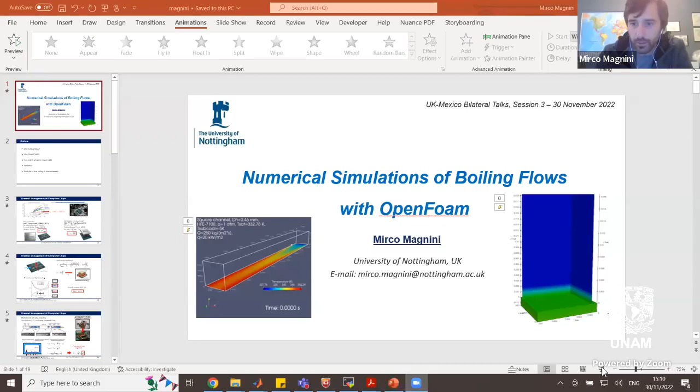Thank you, David. Thank you, Ana Elena, for the introduction to all the session. Let me see how to share screen. And full screen. Can anybody tell me if you can see my slides all right? Yes, we do. Okay, thank you.

Okay, let's start then. So welcome everyone who is attending this session, and my name is Mirco Magnini. I'm from the University of Nottingham, and in my talk I will present a little bit of the work we've been doing in numerical simulation of boiling flows using OpenFOAM, and OpenFOAM is now a quite popular open source software to run computational fluid dynamics simulations, but not only, as I will show. So the talk's general background is heat transfer and fluid mechanics. So you'll need a bit of this to be able to understand what I'm talking about, but I hope it can be useful and enjoyable for people from the wider background.

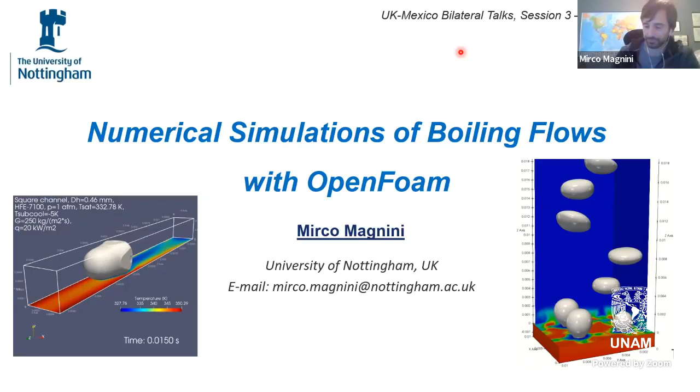So what's the general outline of my talk? I will start with explaining why boiling flows, who cares about it, why OpenFOAM, so why do we need an open source solver to do this kind of simulations. I will introduce the boiling solver that we are using, that we developed ourselves, show you how to do validation of these numerical methods for flows that are quite complex, and then I will jump into how we used it for the specific objective of helping the design of micro evaporators.

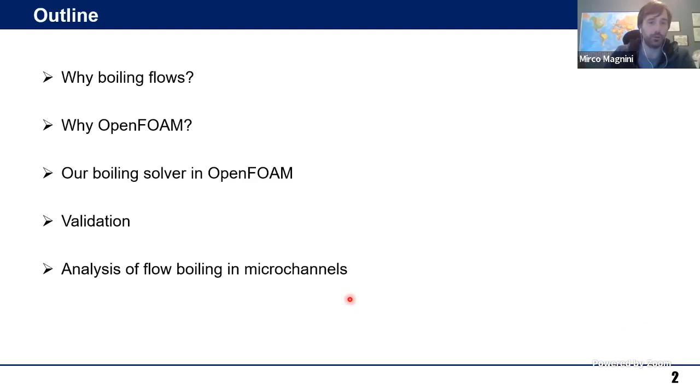And for example, if we consider the workstation we are using to run our simulations, it's quite an old workstation, but if you divide the thermal design power, which is, let's say, the heat generated by the CPU, 280 watt, by the size of the CPU, 74 millimeters square, you get a heat flux which is on the order of the megawatt per square meter. So you can imagine a square meter, and there will be 3.8 megawatts to be dissipated through this small surface.

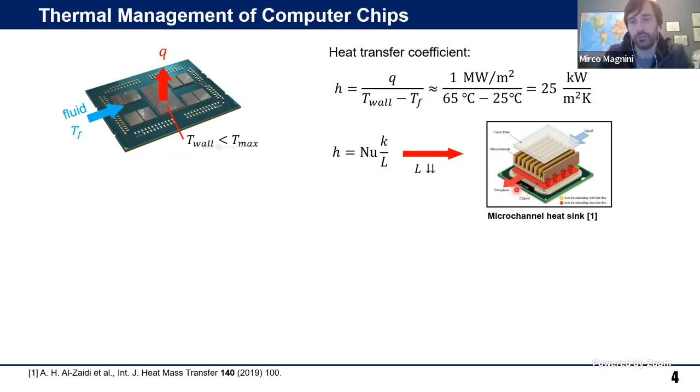And we know from thermofluid classes that the heat transfer coefficient can be estimated as the product of a Nusselt number, which is a non-dimensional number that tells us how good we are at exchanging heat, and the ratio of thermal conductivity of the fluid, which is a property of the fluid, and a length scale. The length scale characterizes the size of these tiny channels. So smaller channels enable us to get higher heat transfer coefficient. And this is the reasoning behind the use of these very small channels.

You see here that we can range the aspect ratio from very narrow and vertically oriented channels to very narrow and horizontally oriented channels. But whatever we do, because it's a very small channel, the flow will be laminar and the Nusselt number is limited. So there is a technical limitation on single phase liquid cooling, which is the best Nusselt number you can achieve is 8.24. And this will put a limit on the heat transfer coefficient that you can achieve.

So here two-phase cooling comes in to help. With two-phase cooling, instead of cooling the microprocessor with, let's say, water at 20 degrees, we bring the fluid close to saturation temperature. And when the temperature goes above saturation, the fluid will boil. It will generate bubbles. And this boiling fluid is very effective in actually removing heat.

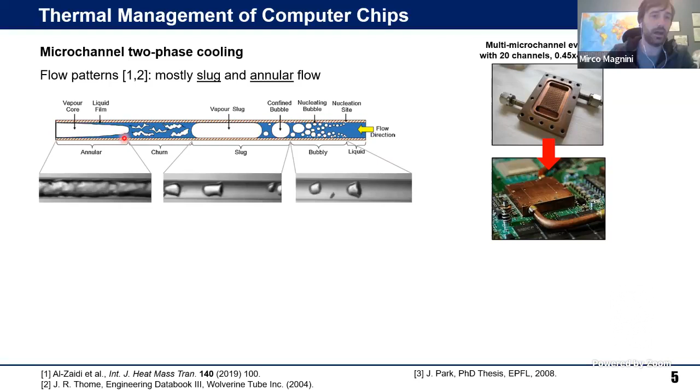So here there is this series of images that shows that a two-phase flow pattern will move from a bubbly flow with many tiny bubbles being generated, to slug flow where you have all these long vapor bubbles that occupy the entire cross-section, and eventually annular flow when you get into higher fractions of vapor in the channel.

And when we consider slug and annular flow, the theory tells us that the heat transfer is related to the liquid film thickness. So these long bubbles all trap a layer of liquid around them. So this is a cross-section of our channel. There will be the vapor at the center, the liquid around it, and we can actually solve very easily the one-dimensional heat transfer through this liquid film. And this is like a year 2 thermofluids class.

You can actually find that the heat transfer coefficient that the two-phase flow will enable can be estimated as the ratio of the thermal conductivity of the liquid divided by the thickness of the liquid film. So potentially we can achieve a very, very high Nusselt number if we have a small film. At the same time, if this liquid film dries because, for example, it evaporates completely, then we will lose a lot of heat transfer because there will be vapor in direct contact with the surface. Vapor has a very low thermal conductivity, and then we are doomed.

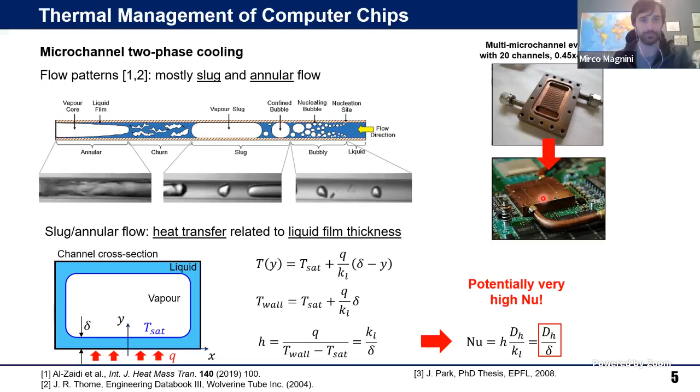The way these multi-microchannel evaporators work is that because we use a dielectric fluid, we can place the multi-microchannel evaporator in direct contact with the surface to be cooled down. So we get a very, very low thermal resistance this way. So this is the reasoning why we want to use microchannel two-phase cooling.

But there is quite a vast experimental literature about microchannel design. And when you look at the literature, especially at the aspect ratio of the channels, you can find a bit of everything and the opposite of everything. You will see people that say low aspect ratio channels are better, others that say high aspect ratio channels are better, others again that say aspect ratio 1 is the best one. So the study I show you today is oriented to find the best microchannel configuration.

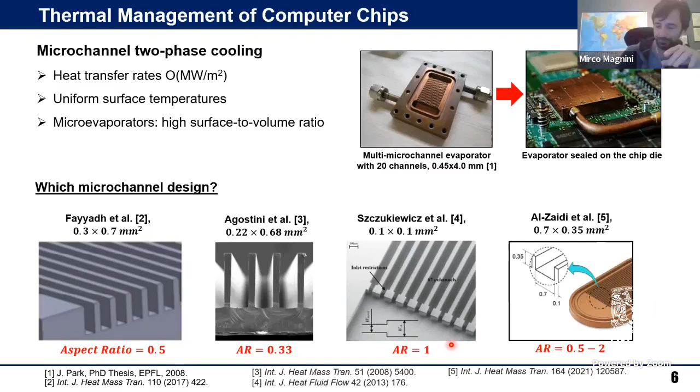But why did we use OpenFOAM to do these kinds of simulations? Well, you may be aware of people working with thermofluids using ANSYS Fluent as a commercial software to solve these kinds of problems. It's a few years since we transitioned to OpenFOAM, mainly because OpenFOAM does not need any licenses. So you can run it over hundreds of computational cores without any license. It gives you complete access to the source code and it's totally customizable. Especially when you use it for research purposes and want to implement sophisticated models, having full access to the source code is really crucial.

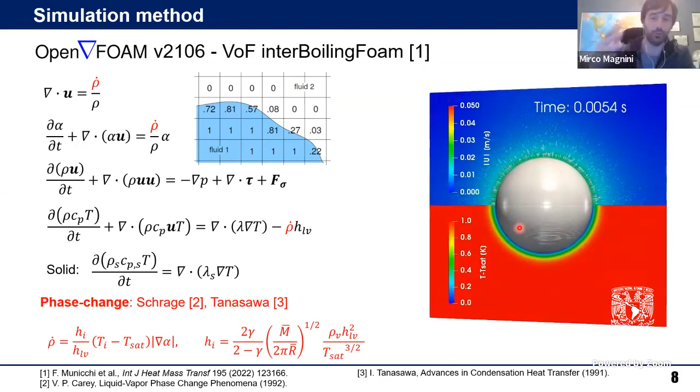This nice video you see here on the right just shows one of the typical test cases where we have a bubble growing in an infinite liquid, and we compare the bubble growth rate with an analytical solution for this problem. Now, how do we validate these kinds of models? So we have done a long series of validations, but here I'm just showing you two limiting cases.

One is called nucleate boiling. Nucleate boiling is the situation in which we have, like in a pot of water, where we boil water, for example, to make tea, and we see that many bubbles are generated in the water. So here we have a wall at a temperature above saturation. So for example, we have a wall at 112 degrees Celsius, and above the wall there is water at 1 atmosphere, so it will boil at 100 degrees.

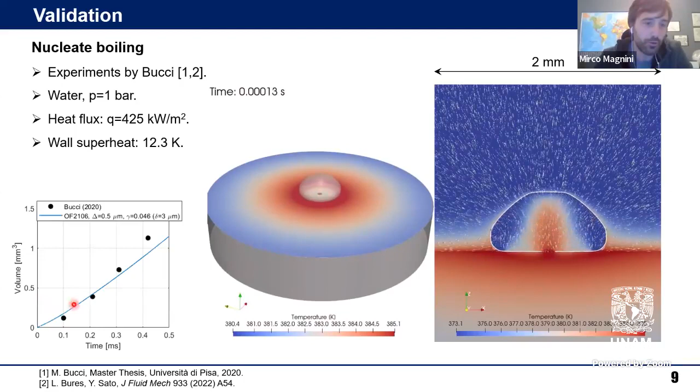A vapor bubble is generated, the vapor bubble grows over the surface, and as it grows, it removes heat from the surface. You see that there is this cold ring underneath the bubble here. So we have done this simulation here to compare with experiments, and we compare the bubble volume over time with the experiment. We get a reasonably good agreement.

Beyond that, now this is a bit more complex, but we are comparing what happens underneath the bubble. Underneath the bubble, there is this very thin layer of liquid that is trapped between the growing bubble and the wall that is fully captured with a mesh. And the experiments we are using for benchmark are giving us the wall temperature as a function of space. X here is the horizontal coordinate.

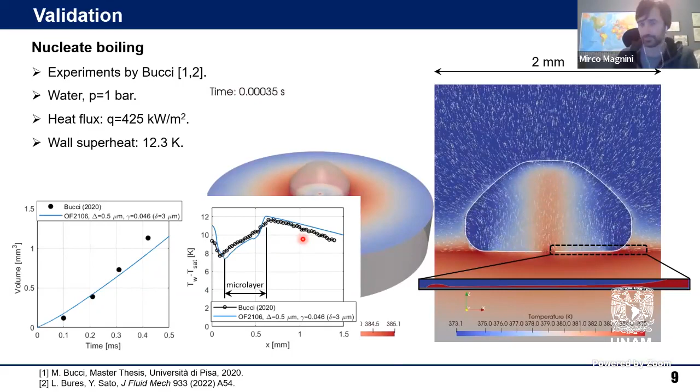And we can compare our simulation with the experimental result where we get the temperature as a function of X, and we see that in the region occupied by the bubble, which is called microlayer region here, we get an excellent agreement with the experiment. The second set of experiments with which we are comparing is more pertinent to the flow we want to study, which is flow boiling in a microchannel.

So we have a small channel, and this time we have water pumped into the channel. The wall temperature goes above saturation. A bubble will grow and will also move downstream because of the flow of liquid. So we have taken an experimental database from the literature where they measure the bubble volume over time.

So after this, we started to work on the study that we wanted to achieve. So we wanted to study the impact of the aspect ratio of the channel, so let's say width over height, the way we define it, on the boiling dynamics and on the heat transfer generated by the two-phase flow. So we start with a long channel with the walls around it. We put symmetry boundary conditions on the sides to emulate the presence of multiple channels.

We give a constant heat flux at the bottom wall, and we first run a single phase simulation until steady state. This is the first step. We let the fluid flow develop until we reach steady state, single phase. Then we seed the tiny bubble, which is this gray bubble that you see here. And we let the simulation run until the bubble reaches the end. At the bottom wall, we set a constant heat flux of 100 kilowatt per square meter.

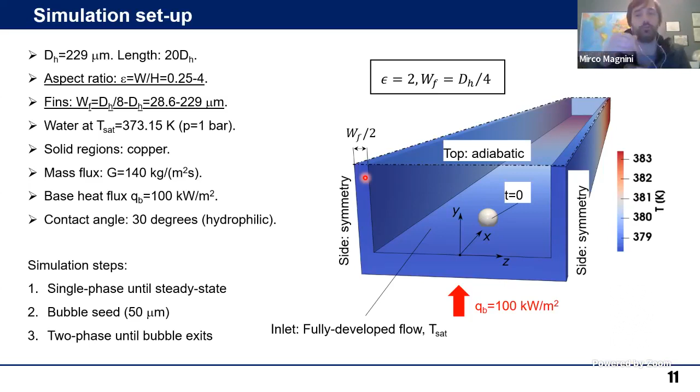And we have performed the study considering water at 1 atmosphere as the operating fluid, and a hydraulic diameter of 0.2 millimeter. We've also studied the effect of the lateral walls. You know, all these parallel channels are separated by a thin wall, and this wall actually has an impact. So we have also studied the impact of the thickness of this wall.

So just to give you an idea of how the simulation works, here we will see a video where we start with this tiny bubble here. The wall of the channel, this is the bottom wall.

We have the left wall. The right wall is clipped to be able to see within the channel. And on the middle image here, we will see the inner side of the channel to see how the wall temperature develops. On the bottom image, we will see the outer surface of the channel.

So as the bubble starts growing, the bubble will grow to occupy the entire cross-section. And when it touches the lateral walls, it generates this contact line on the lateral walls. And you can see that the contact line, the point where the bubble touches the wall, is very effective in cooling down the wall. We can see this ring being developed where the wall is cooled down by the evaporation phenomenon.

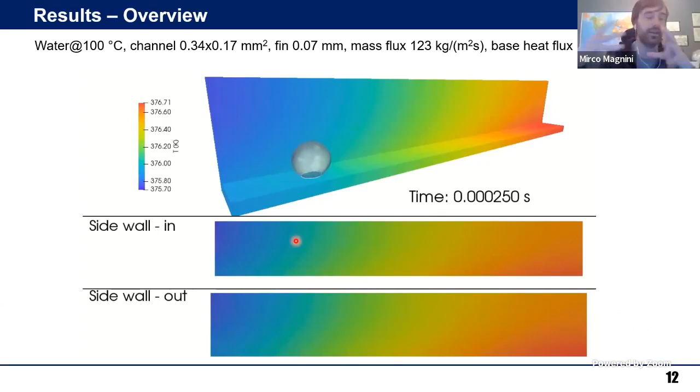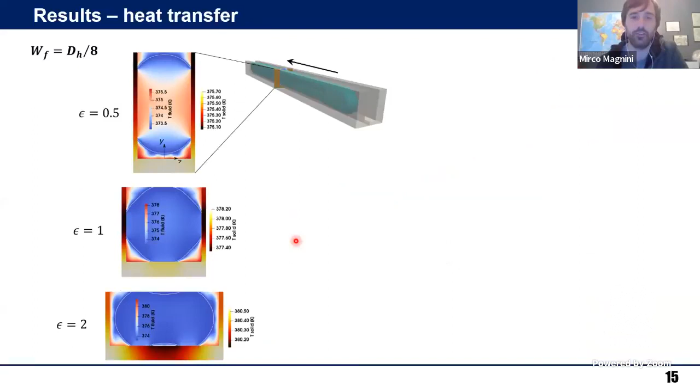What we do eventually is to run all our systematic analysis, extract a lot of data from this kind of simulations, and then process them to derive useful quantities. So for the sake of time, I will just skip all this part here just to get to the final point where, let's say from our simulation, we calculate our Nusselt number at the wall.

So here we have Nusselt number at the wall averaged over the entire walls of the channel at the last moment where the bubble touches the end. We have 3 representative aspect ratios shown here: 0.5, which is a vertically oriented channel, 1, which is a square channel, 2, which is a horizontally oriented channel, always heated from below. And here we see how the Nusselt number changes as we increase the aspect ratio. There is a sort of monotonically increasing trend of the Nusselt number.

And this is done with the smallest thickness of the lateral walls that we studied, which were hydraulic diameter divided by 8. When we consider much thicker walls, so you see here the lateral walls are evidently thicker than what we had before, what happens is that we have a much larger Nusselt number. I had to skip all the slides, but this happens because the walls are hotter. The bubbles grow more quickly and they leave a thicker film of liquid at the wall. Thicker film of liquid means more resistance to dry out, better heat transfer, even though the trend is no longer monotonic.

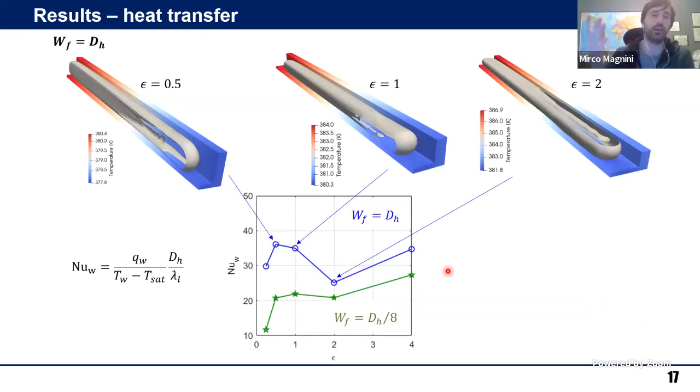So we can run as many simulations as we want, but it's very difficult to extract a general trend out of these simulations. We cannot give just a straight answer which aspect ratio is best. So what we do with all this data is to develop a one-dimensional heat transfer model, which is something that we are doing in the meantime. So we model our bubbles with simplified geometries. We take the heat transfer coefficient given as average of what happens in the liquid regions, in the dry regions of the bubble, and in the regions with the film.

And eventually we compare our heat transfer model with experiment, which is what we have done a few years ago, but for circular channels. And the comparison with experiment is finally the judge to tell us if we have done a good job or not.

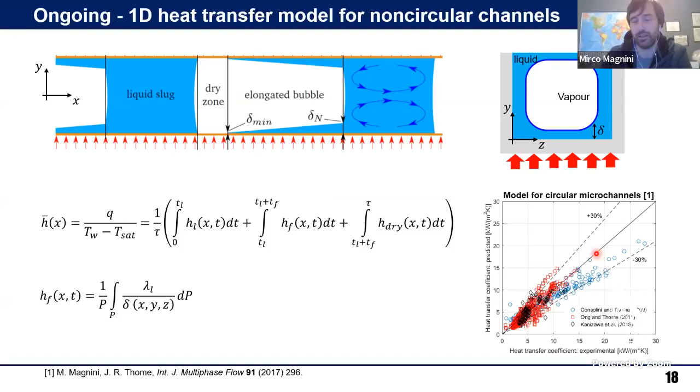So just very quickly for a conclusion, the advantages of using this open source method is that simulations run, in our specific case, on 256 cores in parallel with no licenses. You need some programming skills to use or at least to develop your own solver. We have validated everything with benchmark cases, and we are now drawing our conclusions on which aspect ratio will improve heat transfer, and all the simulations are useful to generate data for model development.

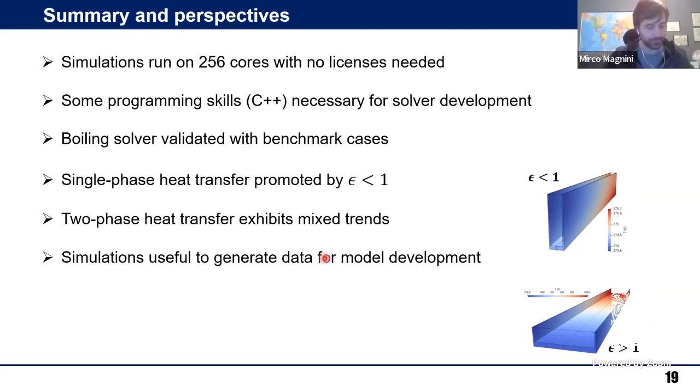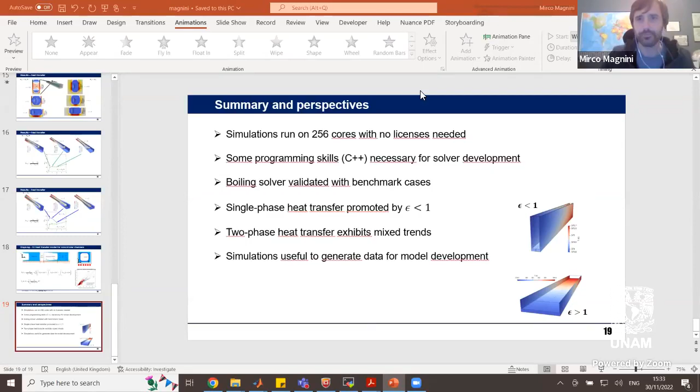Are you still there? Yes. Okay, good. I wasn't sure if I was still connected or not. Yes, you are connected. Actually, I am not sure which will be the order, if we should proceed with some Q&A, but I think that would be sensible. Do you agree, Anna Elena? Yes, of course. We're going to have some questions for Mirko, and then we go over to your presentation, Jorge. Thank you.

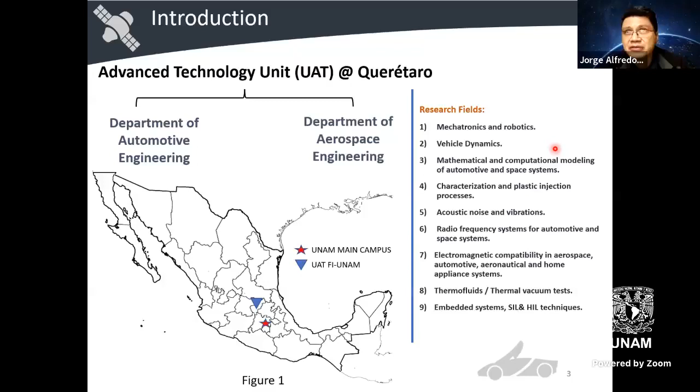But for us, it's more important to try to create these partnerships in order to be side by side, to try to tackle some of their problems. And with this, we want to create some long-term relationships. As you can see, now we are seeing some peeks of the main building of this facility.

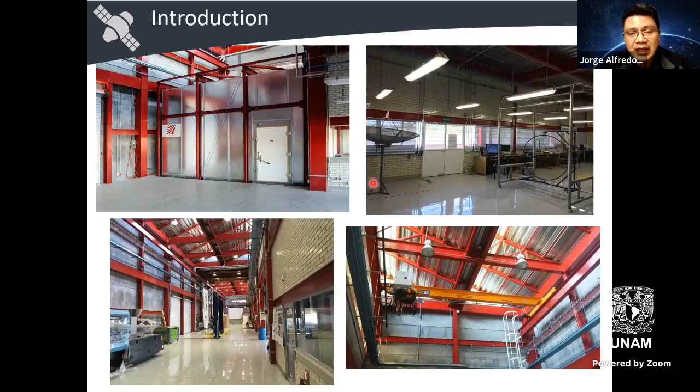It was constructed with an industrial idea. We have several laboratories inside, as you can see. And the most important thing is to understand right now what is a national laboratory. And this is really important because the government of Mexico invested a lot of money trying to create dedicated facilities going from physics, chemistry, some applied science like nanotechnology. Also, they're including some humanistic and linguistic centers to perform research related with social sciences.

And the idea of these facilities is to be unique here in Mexico. The idea is that they don't need to repeat the facilities. Only to be clear, CONACYT stands for the National Council of Science and Technology. It's a branch of the government of Mexico. And knowing this, this particular program wants to tackle 5 different aspects of the environment of Mexico, such as academia, government, society, industry, and the environment.

And they call this kind of set of interactions critical, because they wanted to focus all the resources on the social aspect of solving national problems. So knowing this as a background, the National Laboratory of Space and Automotive Engineering is the only facility here in Mexico, dependent on this national program, to try to foster the design, integration, fabrication, and test of automotive and space systems.

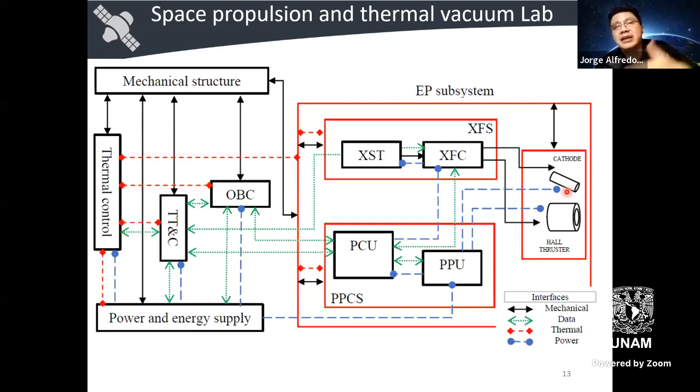And the thruster itself has been a really hard task to perform, because as you know, some of the materials required for the whole thruster are also used for some military purposes. So when we acquired some of these materials, first of all we needed to figure out who is selling this material, and then try to buy it, showing that it will be for academic purposes.

Of course, the Hall thruster is the oldest thruster available for space purposes. This is a very quick diagram trying to show how it works. In particular, we need to take into account that the thruster is divided into particular parts. First of all, a main part that is called the thruster, and another that is called the cathode. Basically, the main idea of how it works is the following.

The cathode will emit some electrons, and these electrons will be captured at the top of the thruster by a magnetic configuration. It can be some magnets, or it can be some copper coils. The idea is that the electrons will be confined at the top in a very crowded cloud, and they will spin at the top of the whole thruster. On the other side, the thruster will receive some propellant from the outside. The propellant can be xenon, argon, or another gas that is neutral.

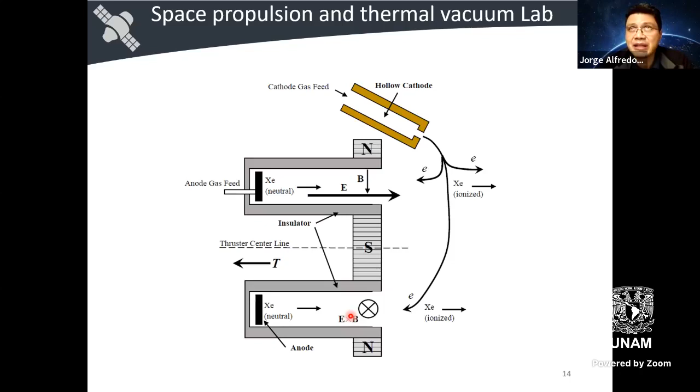For us, it was really difficult to figure out how the thruster will work, because, of course, the literature will mention the basics of how it works. However, they won't tell you the details. So in the end, we are trying to have our own device here in Mexico. We already have a patent of the whole thruster. We're already working on the third version of this thruster, and the idea is to perform the test in the thermal vacuum laboratory that I already showed.

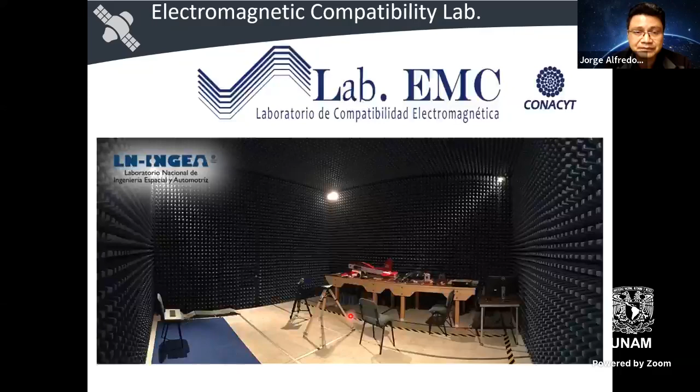The other laboratory that we have is the EMC laboratory. Here in Mexico, we have only three of these facilities, and as you know, depending on the kind of standard that we need to fulfill, it impacts how the laboratory needs to be projected. For this particular case, the laboratory was projected to fulfill the military industry, automotive industry, aerospace industry, and also the electrodomestic industry.

The size of the EMC lab is around 7 by 6 by 4 meters for the internal dimension, and the external dimension is 7 by 7 by 5. So it's this square room that you have here. And the interesting thing here is that this is the only EMC chamber in Mexico where you can introduce a small car of 3.5 tons of weight. This will give you the opportunity to test some of the new kinds of communications and entertainment systems that the automotive industry is trying to foster worldwide.

Of course, for all of the systems that we are developing, we need to create some electronic cards, PCB elements, and we already have the integration line to create these devices. We know that today, you can basically design your own system, your own card, and you can send it out of Mexico, for example to China or another very accessible country where you can pay to manufacture the system that you are sending to them.

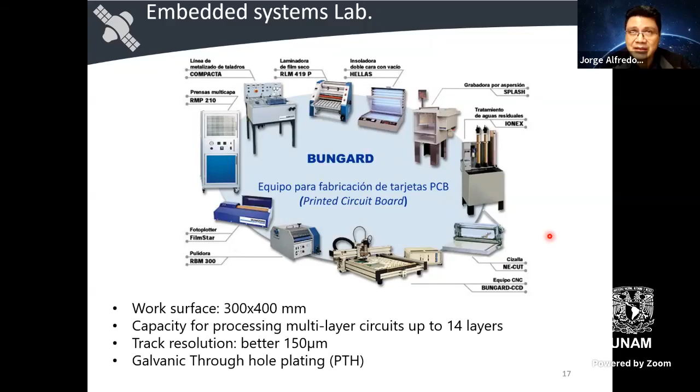Another thing that is good to know is that we have a really nice real-time simulator, the OP5600. It's really interesting to know that with this we can emulate automotive and aerospace systems. In particular, we already use this to simulate the internal pressure of the cabin in an airplane.

Of course, we already have some simulations about the satellites that we're developing, and this is a nice thing to mention, because at the end we have numerical simulation. We have this for real-time emulations. At the end, we are trying to construct all the loop in order to perform all the required simulation that we need before manufacturing the system that we need.

Of course, we have a ground station. This is composed of two antennas. One is a dish antenna, and the other is a VHF antenna. Professor Alberto, I understand, talked a little bit more about this facility. And the interesting thing here, again, is that the combination of these antennas is unique in Mexico, because so far it is the only ground station that can track low orbit satellites.

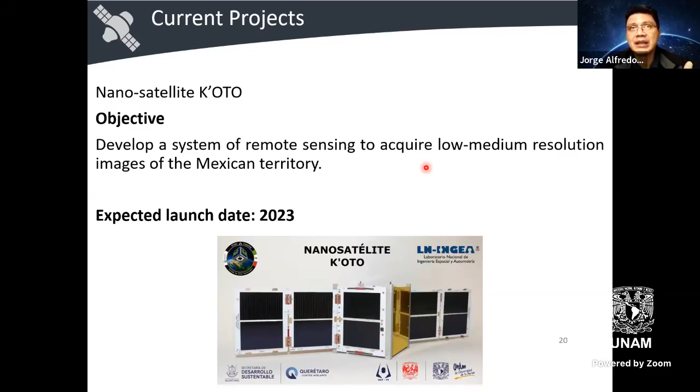Of course, it is important to mention that we have not only the facility, but we have some projects where we're using the facilities. One is Nanosatellite K'OTO, which Professor Rafael already talked about. I don't want to repeat things that were mentioned before, but I think it is really interesting because at the end, this is like our example case that our facilities are in good shape to perform this kind of tests already in Mexico.

Another thing that is interesting to mention is that in 2020, we submitted a really interesting project to create a new academic program, the Aerospace Engineering Program in Mexico City. This is a very interesting program because the duration of this bachelor degree is around 5 years, and at the end the student will choose between two cores of knowledge. One is aeronautics, the other is astronautics. With this, we're trying to fulfill one of the principal needs that the country has.

The industry wants to have very high-end specialized engineers. And the problem is that in Mexico we don't have all the critical mass to create a bunch of good engineers. However, with this, we're trying to put the elements in place to create the critical mass so that in 5 years we can offer very good engineers to be integrated in the industry.